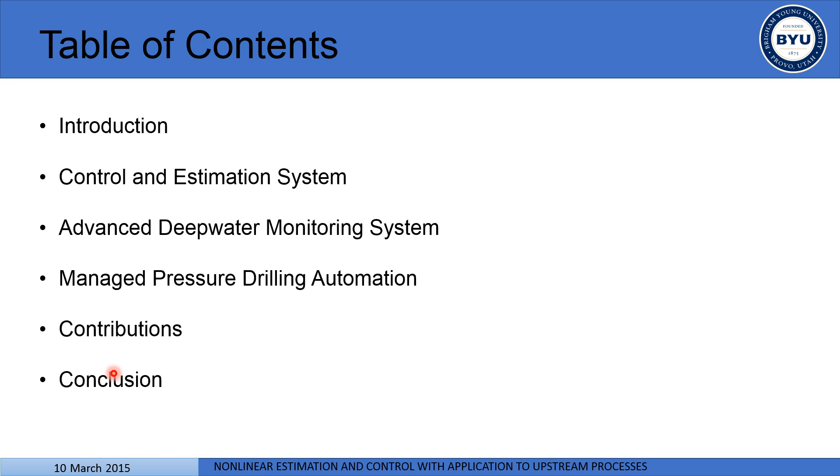First, I'm going to give a little introduction and background about the work and talk about its importance. Then we'll talk about the control and estimation system used for this project, and go over two case studies about advanced deepwater monitoring systems and managed pressure drilling automation. Then we'll discuss the contributions of this work, and conclude the presentation.

Extracting oil is becoming more and more challenging with tighter formations and harsher environments. As drilling reservoirs get depleted over the years, drilling companies have to drill in harsher environments and tighter formations, like shown in these graphs with shale rock and the tension leg platform.

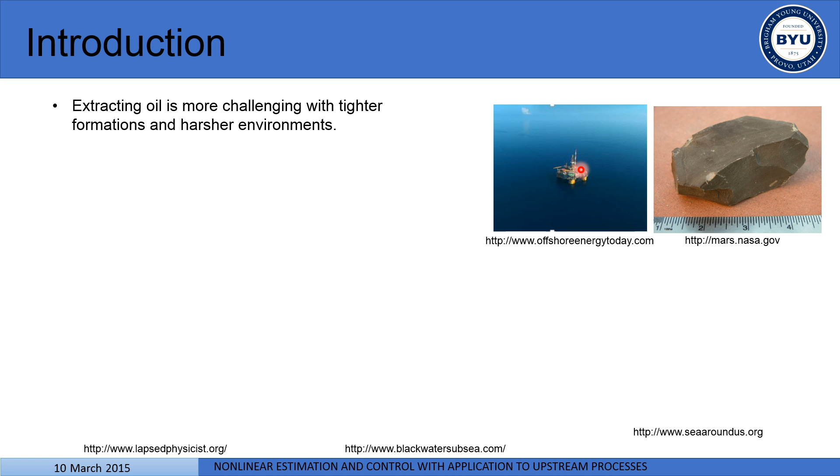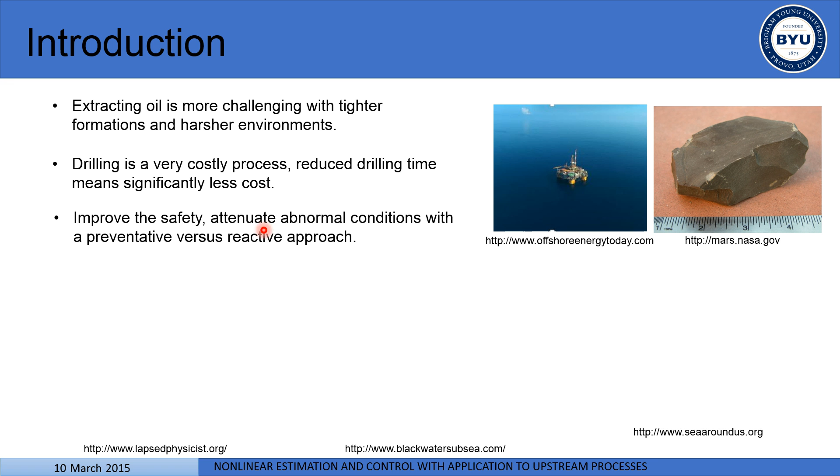The problem with going into harsher environments and tighter formations is the drilling cost, which increases significantly. Another problem is safety, which needs to be improved, since the upstream oil and gas industry is one of the most dangerous industries. There is really a need to attenuate abnormal conditions with a preventive versus reactive approach.

In this picture you can see some of the big catastrophic events that happened in the past. The first one is Deepwater Horizon in 2010, and then the Thunder Horse platform in 2005. These events led to environmental costs, and also threatened the safety of operators and increased costs.

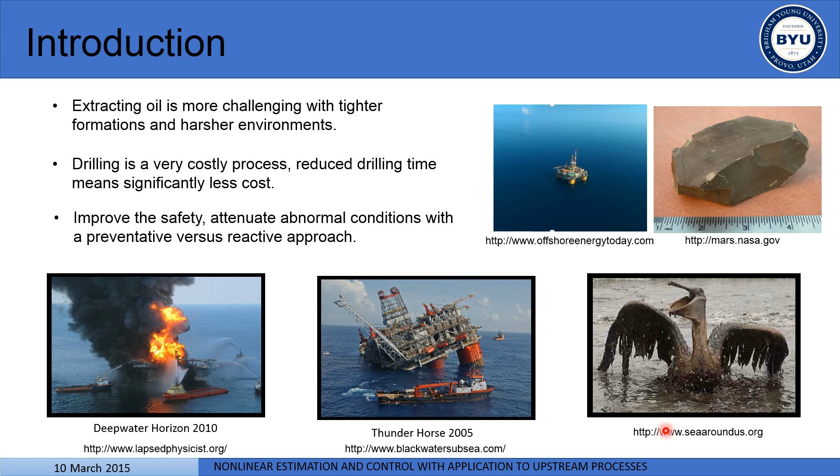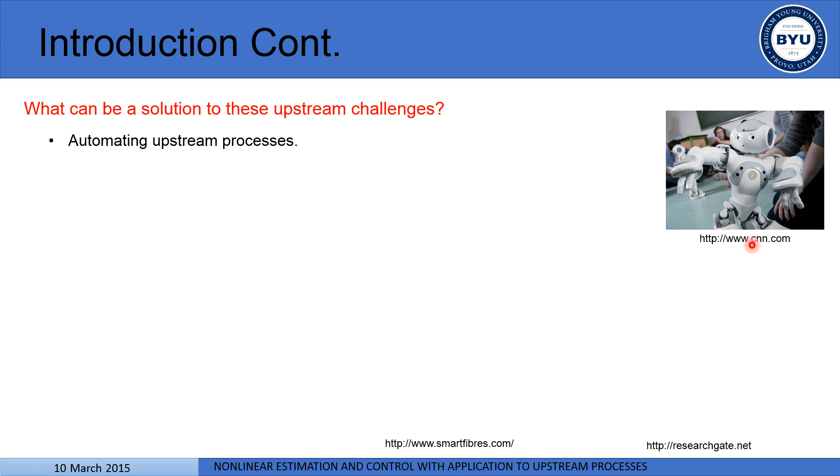So what can be a solution for these upstream challenges? One of the challenges is that upstream processes are mainly manual. Companies in upstream say, other industries like robotics design automated robots, and the UAV industry designs UAVs, but we cannot do automation in upstream. The other problem is that even if they want to design a controller, there is still a lack of sensors and high-speed communication systems.

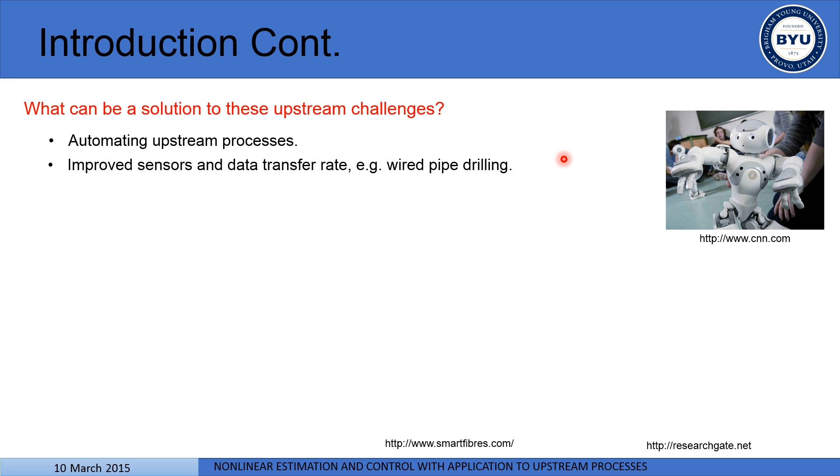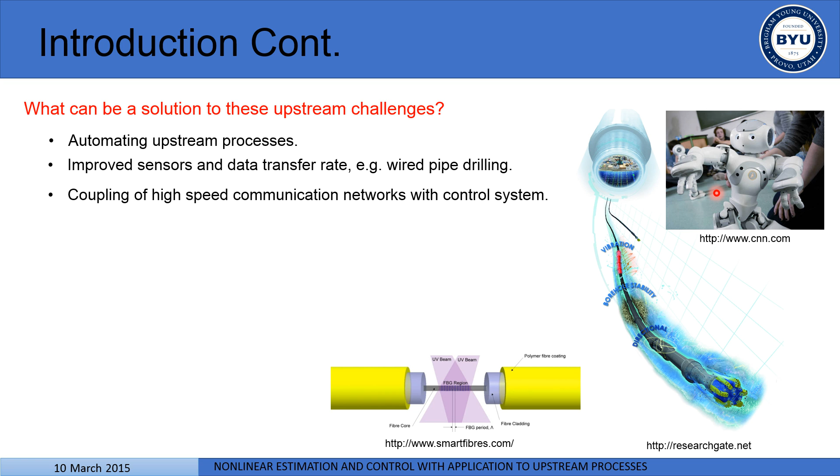Recently, new kinds of data transmission and sensors have been introduced to this industry. These can help fill the gap, so we can design controllers based on that. The goal of this project is the coupling of high-speed communication networks with control systems.

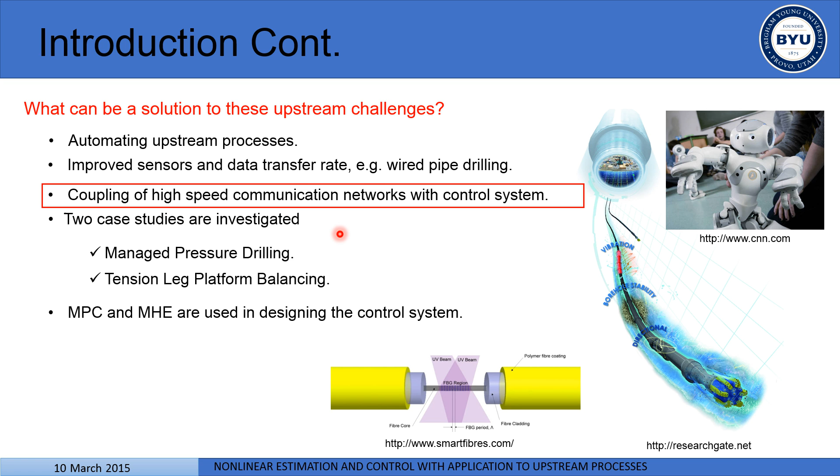For this, two case studies are investigated: managed pressure drilling and tension leg platform balancing. To do this, we use MPC, model predictive control, and moving horizon estimation in designing the control system. So now I'm going to talk about the control and estimation methods used in this project.

For the controller, we use model predictive control. A model predictive controller predicts the system behavior over a time horizon in the future. It takes the system model and creates a cost function based on that, then tries to optimize the cost function over that prediction horizon. Based on that, it determines the best values for the manipulated variables so that the control variable can reach the reference trajectory. It only implements the first input, and then in the next cycle it gets new data and implements it over the next prediction horizon.

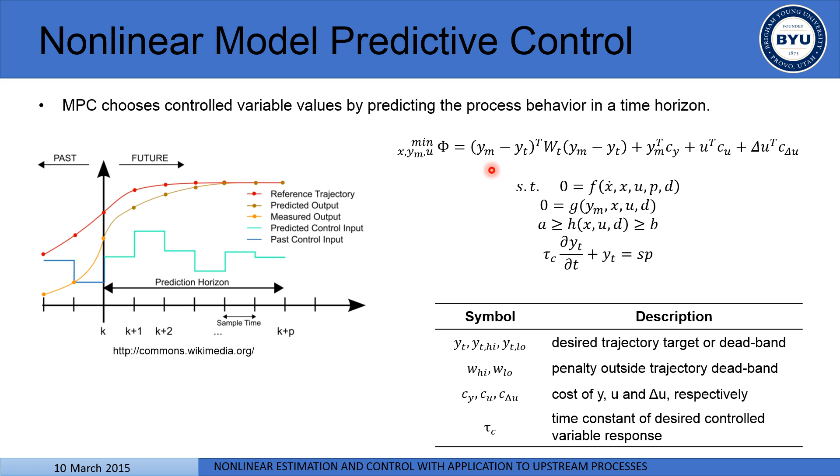This cost function is a squared error term, specifically the squared error between the controlled variable and the reference trajectory.

But there is another new technique for the error term, which we call L1 norm with deadband. It's basically absolute error, but since it's not differentiable, we add slack variables to make it differentiable. We add slack variables for set point high and set point low, putting a deadband around the set point. We believe this approach can increase the robustness of control systems.

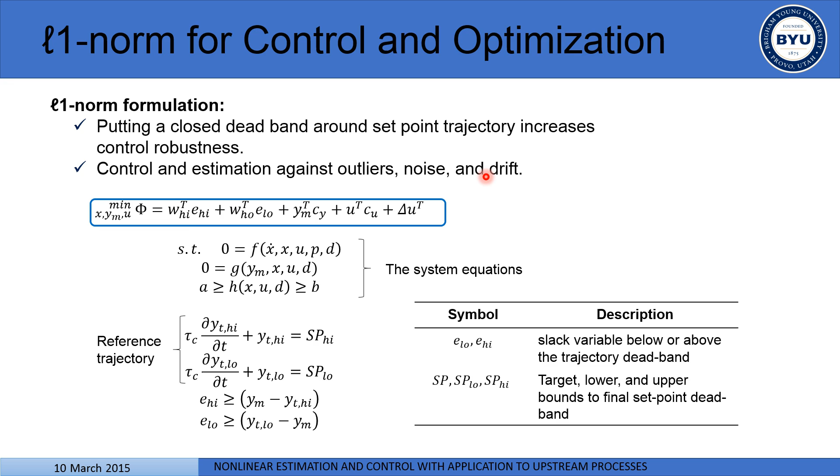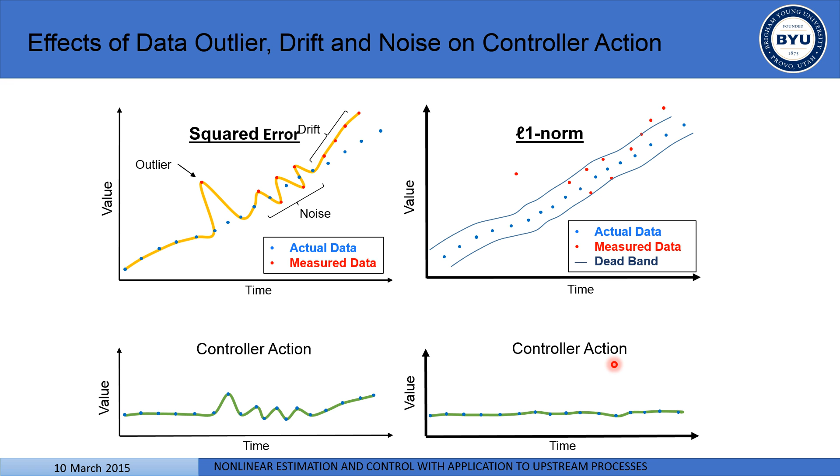But L1 norm with deadband, as you can see in this graph, should be more conservative about it.

So, moving horizon estimation. For estimation, we use a moving horizon estimation approach. It's very similar to model predictive control, but it looks back in time, past in a time horizon, and again it gets the system model and creates the cost function. The cost function is the difference between the measured variable and the modeled variable, and it does optimization to estimate the best value for the estimated variables, so that all of the estimated variables get closer to the measured variable in the past time horizon. The cost function shown here is a square error, because of the square error term.

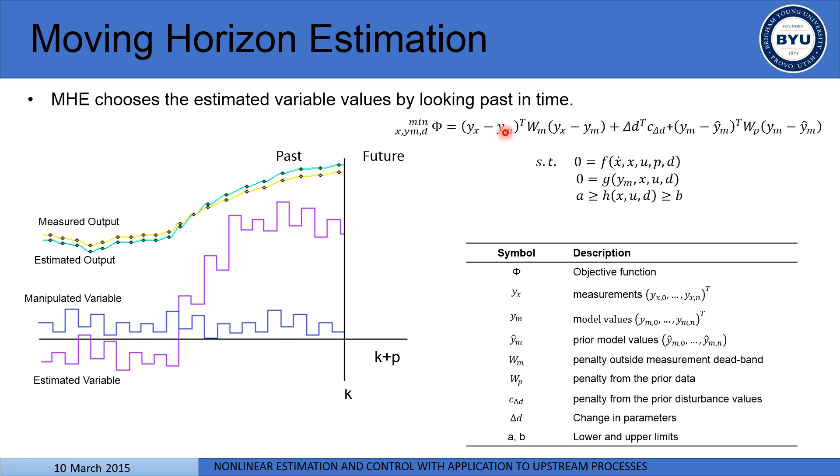Just the same as the control part, we can also have an L1 norm, which is a new technique, L1 norm with deadband. We expect that this can improve the system smoothness and make it continuously differentiable, and it should be less sensitive to corrupted data in industry.

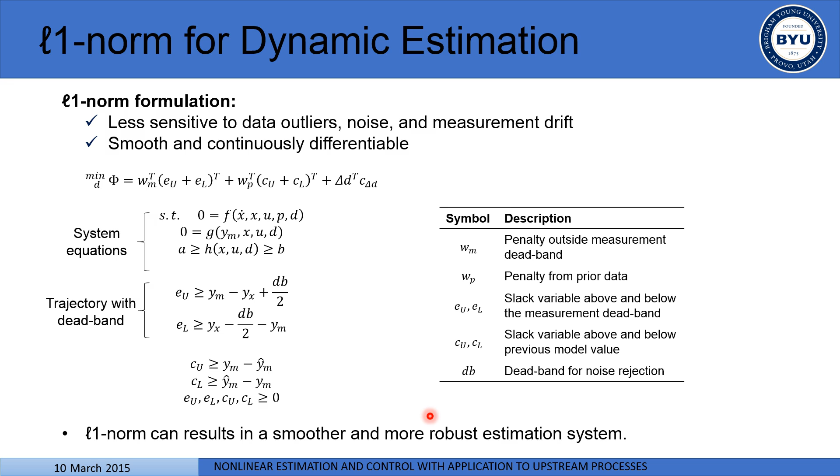In the orthogonal collocator, the differential algebraic equations are changed into polynomial equations, and they are then fed to the controller and estimator, which does the calculation and prepares the cost function and gives it to the dynamic optimizer. Then it gets the result from the dynamic optimizer, and based on that determines the manipulated variable and estimated variable and gives it back to the process.

For the dynamic optimizer, we either use the active set method or the interior point optimization method. Both of them are derivative-based approaches.

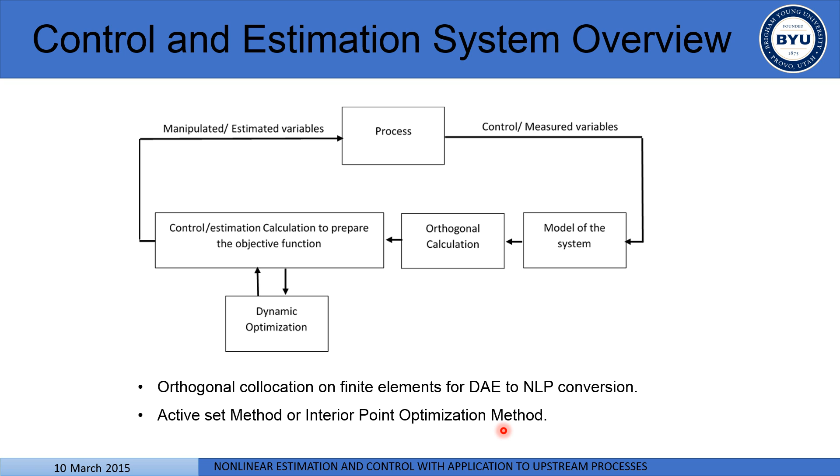As I mentioned, we did two case studies for the coupling of high-speed communication with advanced controllers. The first one is an advanced deep water monitoring system, which was a smaller part of my project. The goal of this project is to design a controller and a monitoring system to balance TLP, tension leg platforms. First, what is a tension leg platform? It is a vertically moored floating structure in the ocean, and it houses drilling and production equipment. There has been no research in the past regarding balancing TLPs using ballast tanks.

But what we see is that TLP platform control is very similar to UAV control during hovering. A quadcopter is controlled by manipulating thrust forces from individual rotors as well as balancing drag torque, and a TLP is controlled by manipulating the ballast tank water levels as well as tendon lengths.

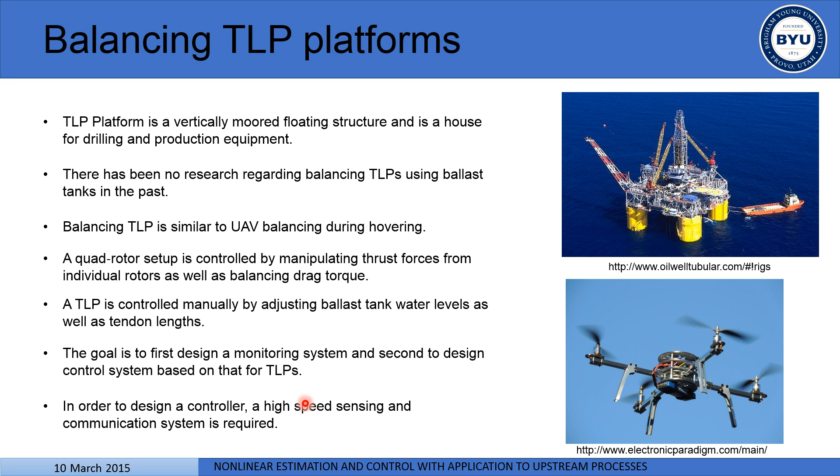So the goal here is to design a monitoring system for the TLP platform and then design a control system based on that. In order to do that, a high-speed sensing and communication system is required.

In this slide, I go over the monitoring system that we designed. The monitoring system for TLP is based on fiber Bragg grating sensors. How a fiber Bragg grating sensor works is that wavelengths are sent through a laser to the Bragg grating sensor, and the Bragg grating has different refractive indexes, and based on that it reflects back part of the wavelengths. We get that wavelength, and based on its value we can determine the temperature and strain values.

This picture shows the schematic overview of the monitoring system that we designed, and you can see it's a combination of multiple programming languages that can talk to each other.

To install them on the TLP tendons, we used specially designed clamps on each one of the tendons, as you can see in this picture.

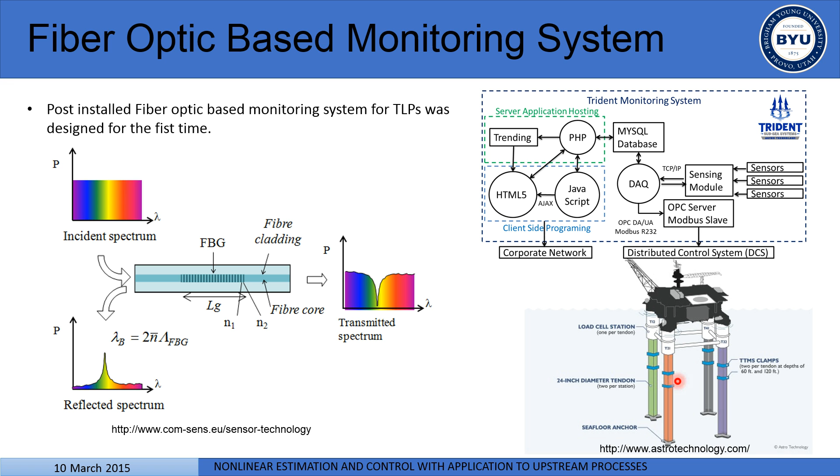Results after installation: we actually installed this system on two real tension legs on the west coast of Africa, and you can see the real results from that. You can see that in 24 hours we have two tides that happen over time, and you can also see the waves, the smaller noises here.

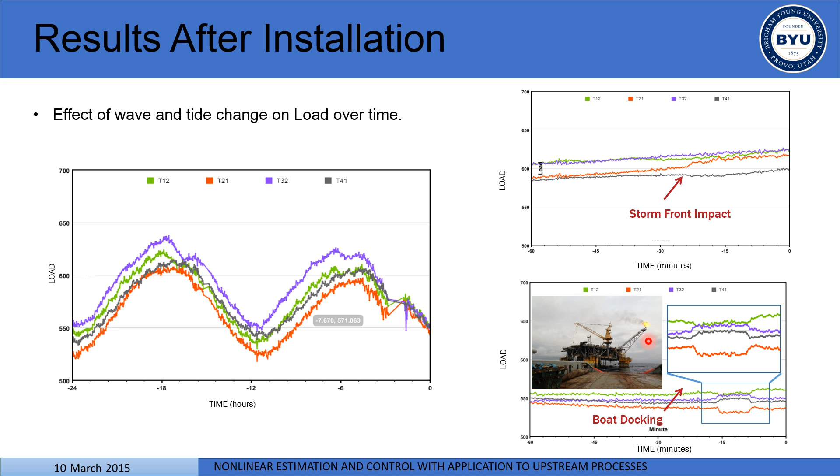This system showed that it is much more sensitive to any change in the environment. For example, storm front impact and boat docking were very visible on this system, things the operators' conventional system couldn't catch.

For designing the control system model, what we said is that in each one of the tendons, the load is the load of the platform itself plus the load from the tank, minus the buoyancy load, minus the wave load, and plus the tide load.

For the load of each tank, we use the time transient equation for the volume of the tank, which depends on the pump flow rate, the exit flow rate, and exit valve opening. For buoyancy, we use an empirical equation to determine buoyancy in the modeling part, but for the controller, we say buoyancy is measured as the percentage of the platform that is inside water. For wave and tide actions, we modeled them with sinusoidal equations, but for the controller they are assumed to be disturbances.

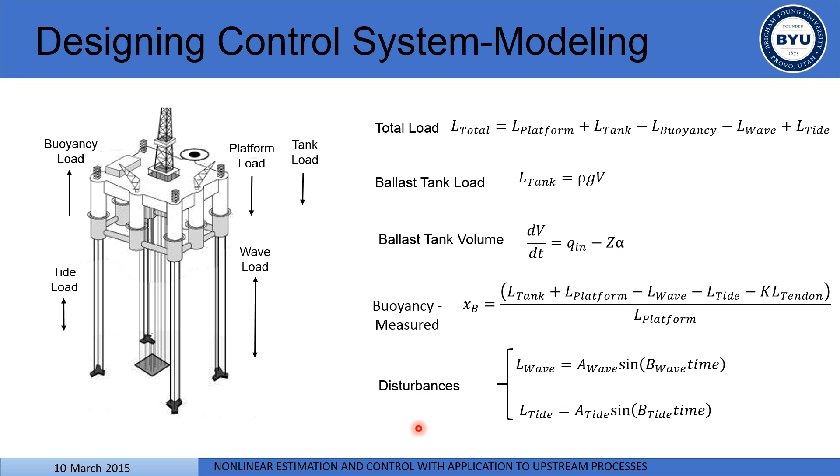This graph shows the schematic overview of the control system. As you can see, the tide and wave actions are considered disturbances into the system, and the data acquisition sends the measurements to the controller, and the controller also gets the set point from the operator.

So for modeling the TLP platform itself, we use the equations we just showed you, and we also use the same ones for the controller design, except for the tide, wave, and buoyancy.

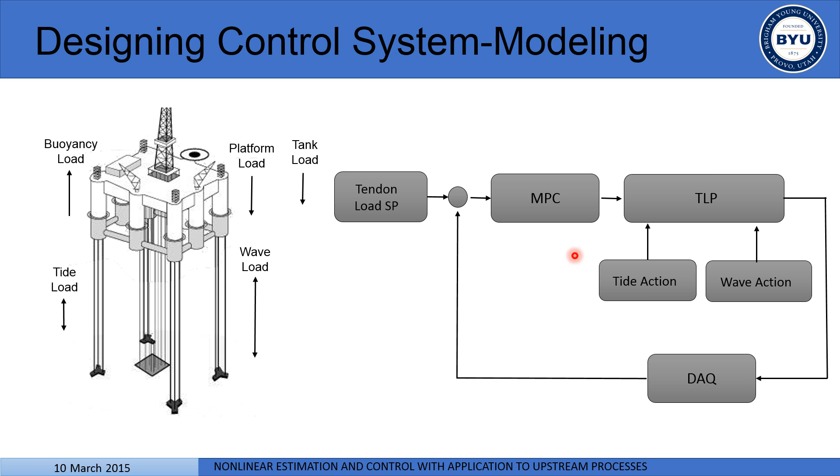These are the results of the control system in a simulated environment. As you can see from these graphs, the dashed red line shows the change in the loads over a 24 hour period without a controller, but the other lines show how the load changes with the controller. You can see that the controller is able to significantly decrease the tide effect on the TLPs.

This controller was mainly designed to attenuate the effect of tide, not the waves. Whenever the tide is falling, the controller opens the valve to compensate for that, and whenever the tide is rising, the controller opens the pump to compensate for that. We designed the controller so it either opens the pump or opens the valve based on the magnitude required.

Also in the graph on the right, you can see how the volume of the tank is changing based on what the controller wants.

So we believe that with these results, we can say that automatic balancing can result in reduced drilling time, because the TLP becomes more balanced, and this can also lead to increasing the lifetime of the TLP. Advanced monitoring and control systems can improve the safety of the TLPs for sure.

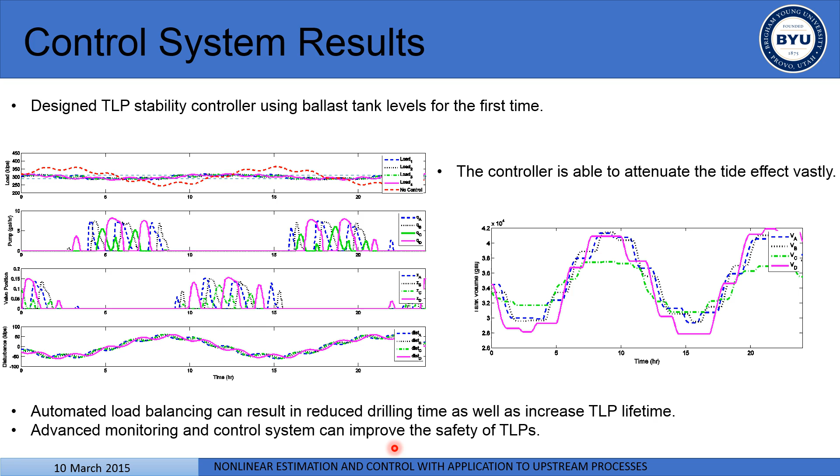So the next section, which is the majority of my project, is managed pressure drilling automation. First of all, what is managed pressure drilling?

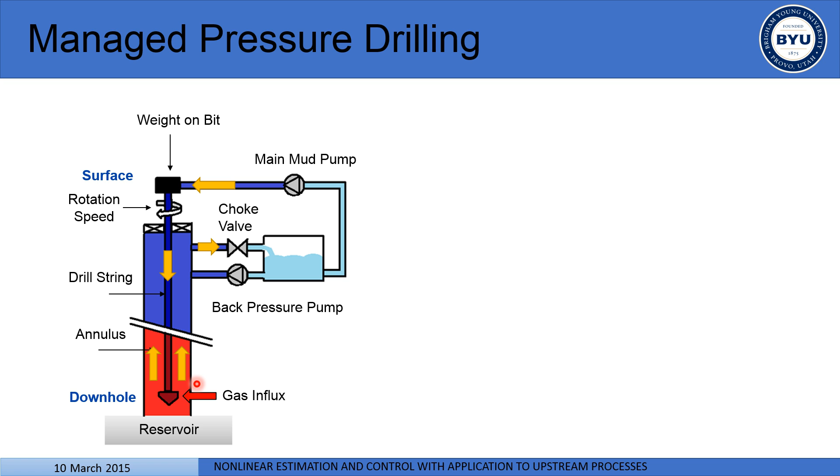In managed pressure drilling, mud is pumped with the main mud pump, and it goes through the drill string and through the drill bit, then comes back up through the annulus and through the choke valve into the mud pit. Weight on the bit and rotation speed are used to change the rate of penetration of the bit, and the main pump and choke valve are used to determine the pressure, along with the hydrostatic effect of the mud. Sometimes gas influx happens, and if it's more than a specific value that cannot be controlled, we call it a kick.

Some of the variables are known, meaning we can measure them. They are everything at surface, but from the variables at the downhole we can measure RPM and weight on the bit, because RPM and weight on the bit are different from surface and downhole. Annulus pressure is also measured, but we can send it to the surface through either mud pulsing or wired pipe technology. Not every variable can be measured.

Some of them are unknown, such as the density in the annulus and the friction factor in the annulus, as well as downhole drilling fluid and gas influx flow rates, which cannot be measured. So as we mentioned, for this project we designed a controller based on wired drill pipe.

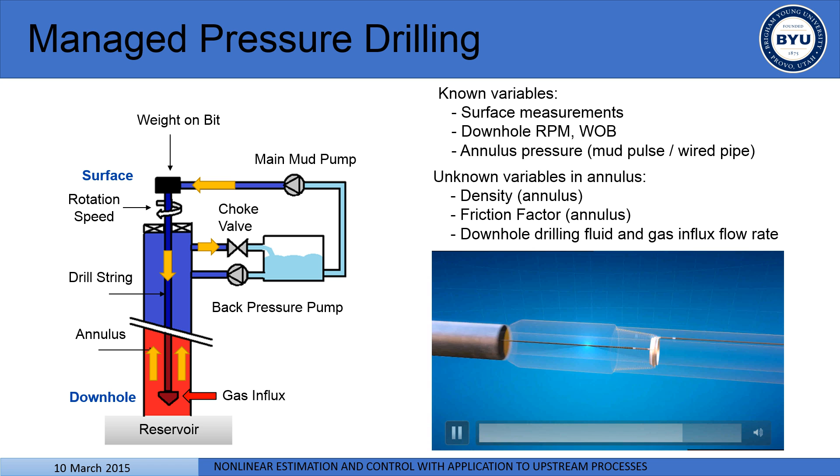As you can see in this video, the measurements go through a wire line in each of the drill pipes, and at the end of each drill pipe, in each connection, it goes through a coil and then gets connected to the next drill pipe. In this way, all of the pressure measurements are sent to the surface, and this is a new technique in the upstream industry that has very high speed.

Okay, so first we want to talk about the previous work that has been done for managed pressure drilling. In managed pressure drilling, researchers have looked at it as two separate tasks. Part of the researchers have tried to maximize rate of penetration with optimization techniques, changing the RPM and weight on the bit, and some researchers have tried to regulate borehole pressure with changing the choke valve and the pump flow rate.

So the thing is that ROP also depends on borehole pressure, and borehole pressure depends on friction factor, and through friction factor it depends on the RPM.

We believe that with this controller, for the ones that have designed the BHP system, if they consider these as two separate tasks, they ignore the effect of weight on the bit and RPM along the drill string, and also they have ignored the effect of downhole pressure on the rate of penetration. There is potential for improving that.

For the pressure, most of the researchers have used surface measurement without wired drill pipe, and this can lead to delayed response to the kick event, because whenever a kick happens at the downhole area, it takes some time for the effect of the kick to be felt at the surface. Also, estimation of the fluid properties becomes difficult with this, because we are not measuring pressure directly, and this leads to reactive pressure control versus proactive.

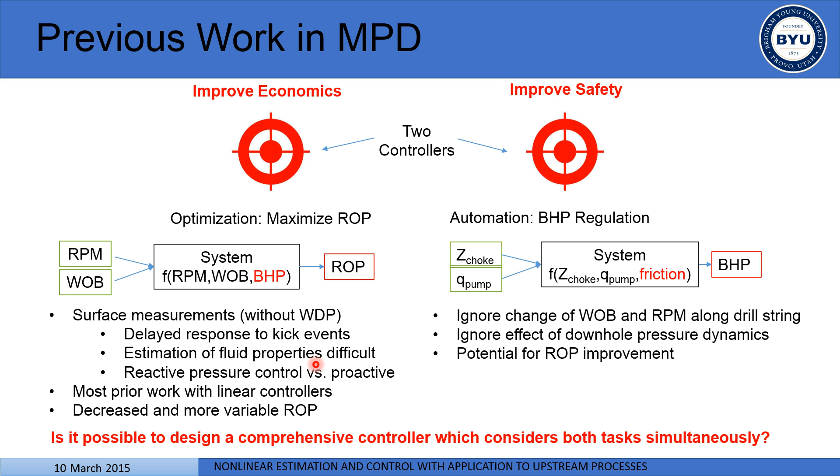Our proposed solution is a comprehensive controller that controls both of the tasks simultaneously. It tries to control both borehole pressure and rate of penetration at the same time, by changing all of the manipulated variables, including choke valve opening, pump flow rate, RPM, and weight on the bit.

The features of this controller: first, as I mentioned, it simultaneously controls both of the variables. Again, if we want such a controller, we have to consider the interaction between the drill string and the hydraulics. We can also propose a new methodology for kick attenuation based on direct borehole pressure measurements from wired drill pipe telemetry.

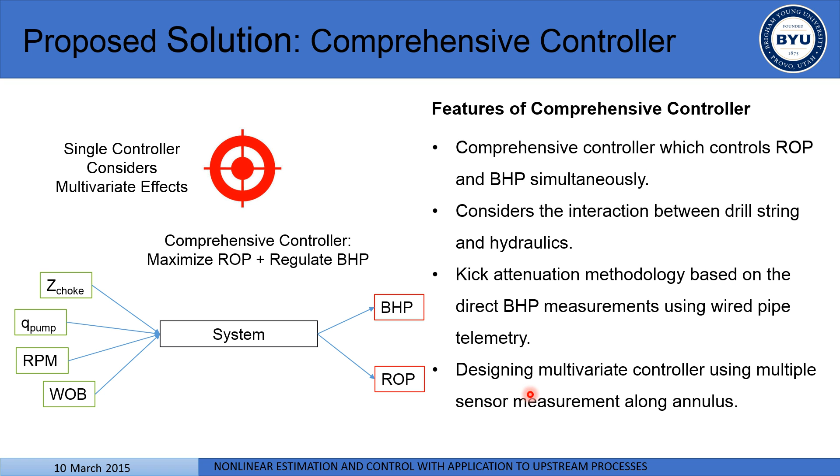Another thing that we wanted to do is design a multivariate controller using multiple sensor measurements along the annulus. This is possible using wired drill pipe.

What are the expected advantages? Expected advantages are higher ROP and less fluctuations in ROP, improved kick attenuation with an extra manipulated variable, because we add extra load and can further increase the pressure in the annulus, decreasing the gas influx flow rate faster. This can also lead to earlier detection of cuttings buildup during drilling, and in the end it will improve safety and reduce drilling cost.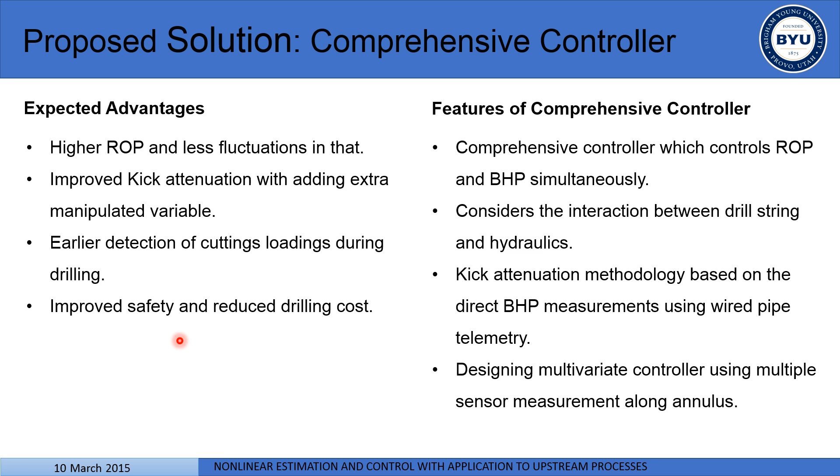So, model components that we use - I'll just go through them as an overview. For pressure hydraulics, we use the lower order model from Stamnes et al. Then, as mentioned before, the interaction between drill string and hydraulics needs to be considered so we can have a comprehensive controller.

For that, we say ROP also depends on the downhole pressure. Therefore, we use the Bourgoyne and Young model, which has a term for the downhole pressure effect on ROP.

We also say the friction factor in the annulus depends on both axial and rotational flow of the mud. As you can see in this graph, mud has two kinds of flow rates: axial flow rate and rotational flow rate. There are some empirical equations relating the friction factor to both of these flow rates.

So we use this, and we said okay, if we change the rotation speed of the drill string, we can affect the rotational flow of the mud, and therefore we can affect the friction factor, and we can affect the pressure loss. This way we can affect pressure by changing the drill string characteristics. This is one of the contributions that hasn't been done before and is unique to this controller.

To model the drill string dynamics, for the drill string we use multiple mass spring damper pendulums in series, and for the weight on bit dynamics we use a first order plus dead time model, which is an empirical model. Both of these relate the surface value for weight on bit to the downhole weight on bit.

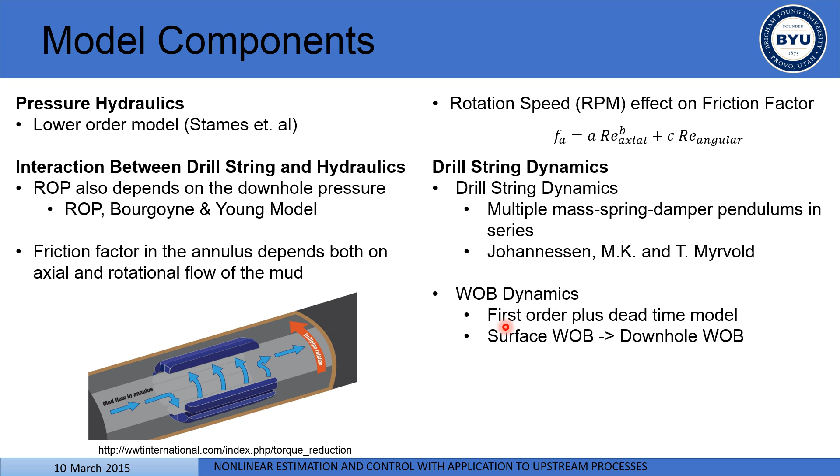Another thing for this research is that previous researchers have only considered one weight on bit value, while this research considers both surface and downhole weight on bit, and the same thing also for RPM.

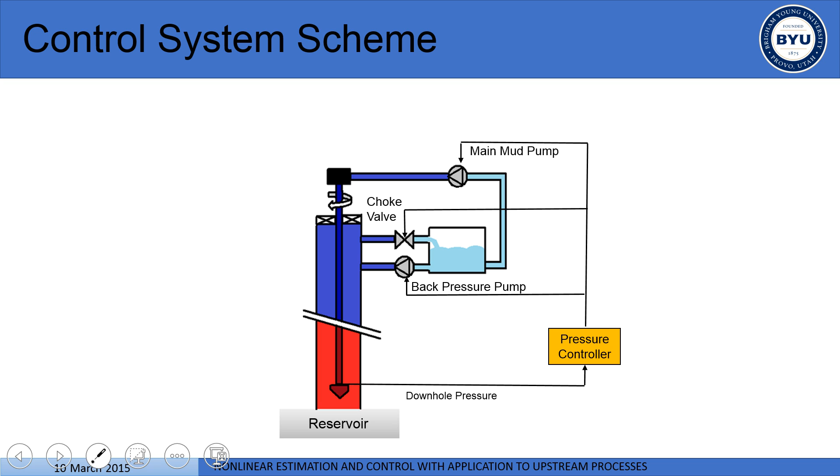So how do we design the control system? First, we put the pressure controller, and it controls the downhole pressure by changing the pump and the choke valve. Then, because this is a model predictive controller and it needs a model of the system, not every variable is measured in this controller.

So therefore, we need to have an estimator, as I mentioned before, so that it can estimate some of the values for some of the variables, for example, density, friction factor, and gas influx. And it is fed to the controller.

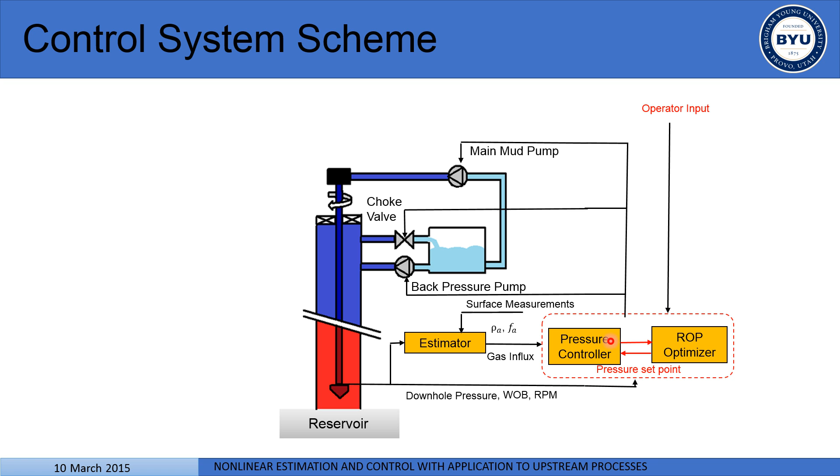And after that, we added an ROP optimizer with the interaction between the drill string and the hydraulics. And this ROP optimizer is able to determine the best manipulated variable by considering both the dynamics of the drill string and the hydraulics.

And it determines the choke valve opening and the pump flow rate. And at the same time, it also determines the best downhole weight on bit and RPM.

Again, we have two different controllers, one for weight on bit and one for RPM, each of which gets the set point from the comprehensive controller, and then they change the surface values for RPM and weight on bit so that the downhole values for them can get closer to the set point ones.

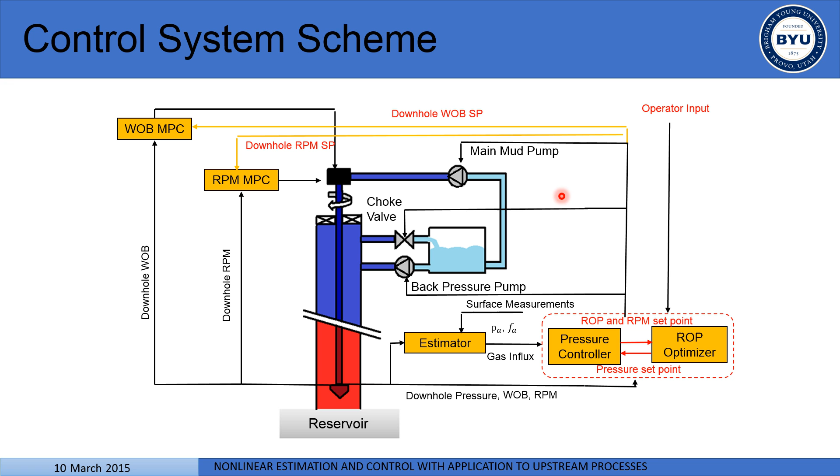So in this system, during normal drilling conditions, the ROP set point is given, and based on that it determines what the downhole pressure set point is, based on all of the interactions between the drill string and the hydraulics, and based on that it changes all of the variables in a way that leads to higher ROP.

And for kick attenuation, we also proposed a new methodology. During normal operation we have our set point as downhole pressure.

Whenever a gas influx happens, the value for the downhole pressure that is measured with the wired drill pipe is going to change. If it is more than a specific limit, then the controller is going to say we have a kick condition. Another way for the controller to determine if a kick happens is that the gas influx flow rate increases, which it gets from an estimator.

So once it determines a kick has happened, it switches the controlled variable from downhole to the surface and sets the choke valve pressure as a new set point. Its new set point is the value of the choke valve before the kick happened plus an error term, which is like a PID equation.

So then it tries to change the choke valve opening and the pump flow rate, and also the rotation speed, RPM, so that it can reduce the gas influx flow rate. It does this until the gas influx flow rate gets less than a specific limit.

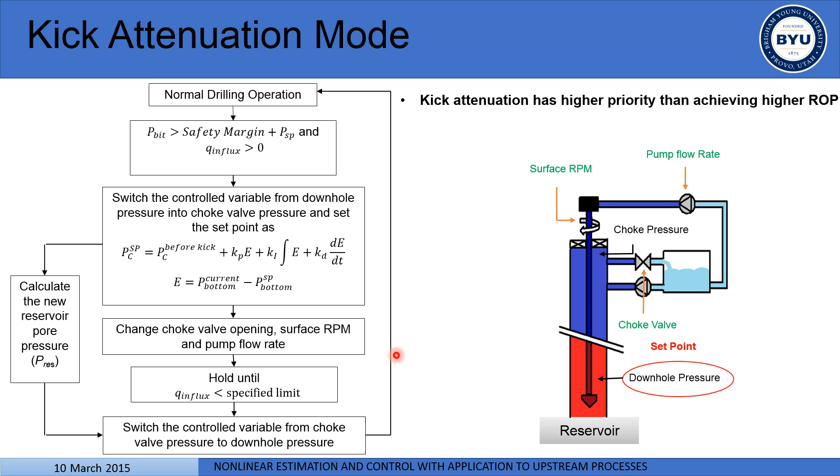And therefore, when everything comes back to normal and the kick is attenuated, we go back to normal drilling with the downhole pressure having a new set point based on the new reservoir pressure value.

So now, as I mentioned before, we design a controller in three steps. The first one is a single pressure controller, the second one is a comprehensive controller, and the third one is a multivariate controller. In this section I'm going to present the results for the single pressure controller.

I'm not going to show you the graphs for the results of this normal drilling condition, just because of lack of time. But the designed controller, the moving horizon estimator for the single pressure controller, was able to accurately determine the friction factor and the annulus density within 1.5% of actual value in 30 seconds.

And also, the drill bit pressure controller was able to control the drill bit pressure within 0.72% of the set point within 30 seconds.

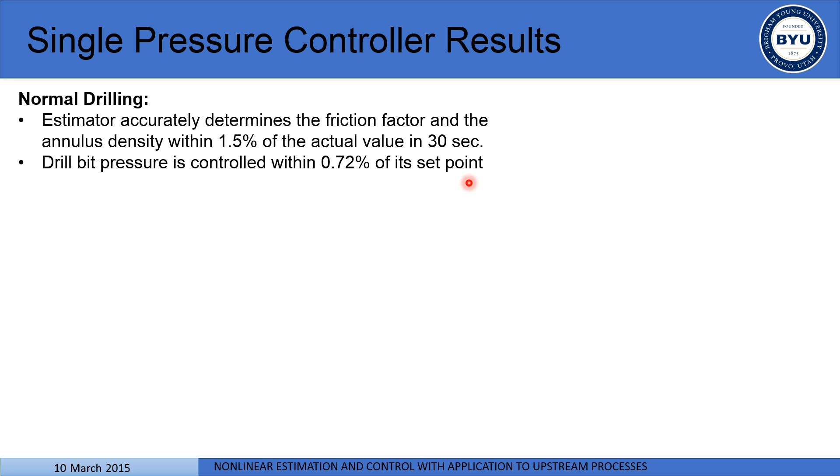So during connection procedure, first, what is a connection procedure? During connection, we call connection procedure for a time that a new drill pipe is added to the drill string, and in this case the main pump gets ramped down until it gets shut down, and the new pipe is added, and it again gets ramped up, everything back to normal.

But in this condition, we are losing the head of the main pump at the downhole area. Therefore, our pressure at the downhole decreases. It's kind of dangerous, because if the pressure gets too much lower than the reservoir pressure, it can induce the kick. So the controller that we designed was able to change the choke valve opening and also the back pressure flow rate accordingly, so that it is able to hold the pressure almost constant within 1% margin of error during connection procedure.

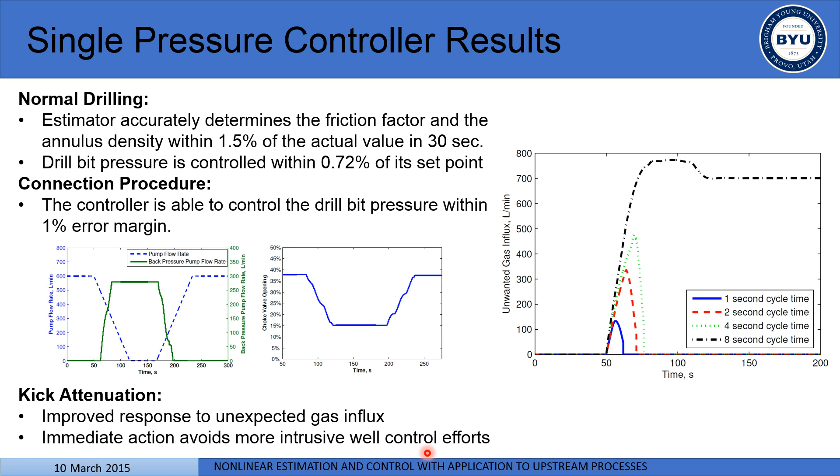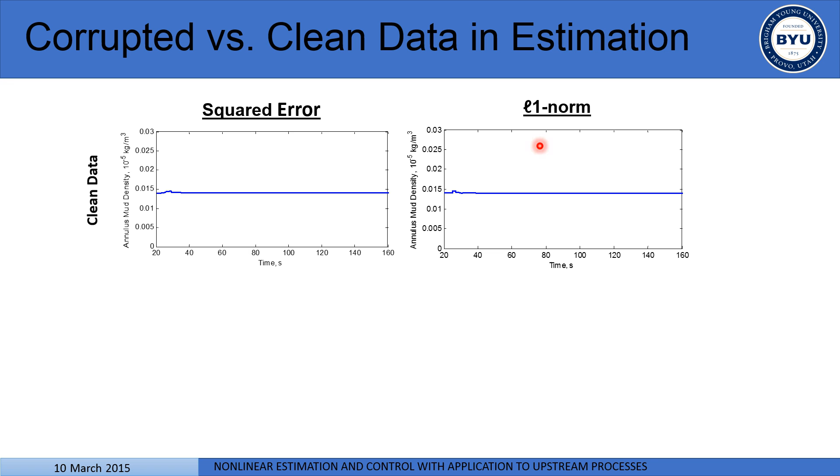So in this slide, I'm gonna compare the estimator and the controller in case of corrupted data versus clean data. As you can see on the graphs on the top, we have clean data, and there is not a specific difference between the L1 norm and the square error. But when we go to corrupted data that has drift and outliers, you can see that the L1 norm is able to be more resistive to that.

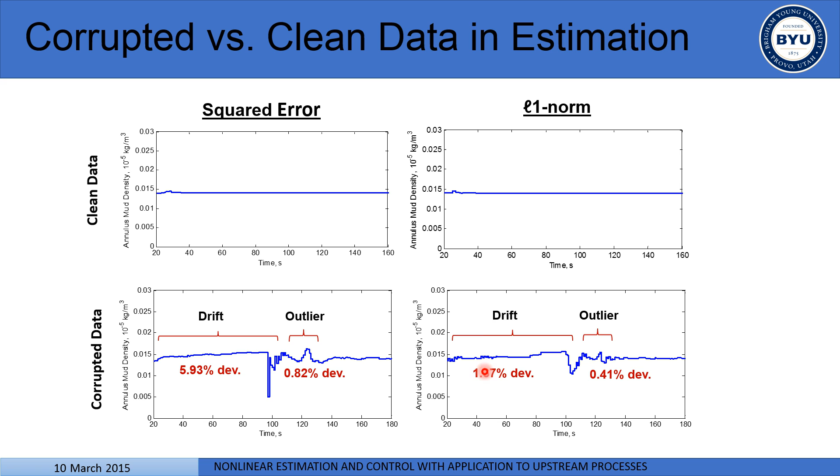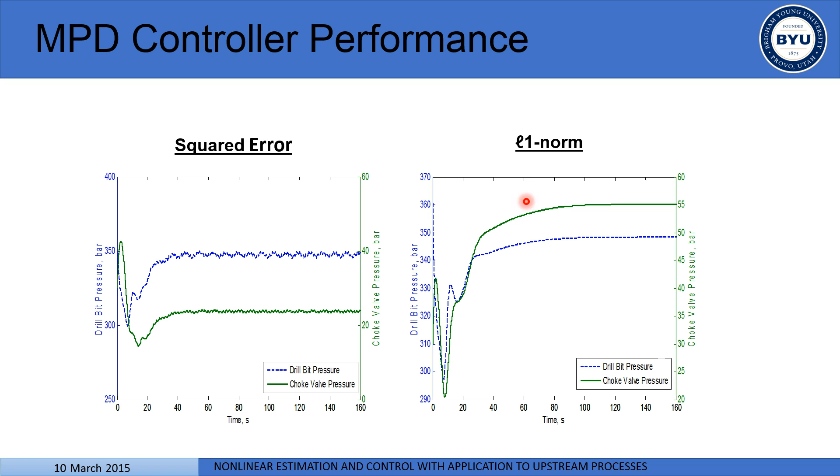And the same thing again for the controller. In case of corrupted data, the square error has some problems with oscillation, but the L1 norm is much more smooth, just the effects that we were expecting to see.

Okay, the next part is managed pressure drilling automation with comprehensive controller. So the comprehensive controller was designed based on the models and ideas that I just told you, and the results show that ROP, rate of penetration, in case of comprehensive controller increases versus the single pressure controller. The reason for that is that during comprehensive controller we have less downhole pressure, and decreased downhole pressure exponentially increases the ROP.

And also another great result is the kick attenuation. It was found out that having a comprehensive controller, we are able to even attenuate the kick much more faster. So in this graph, the black line shows how an operator would react to a kick, so it's a manual attenuation of the kick. The blue line shows how our single pressure controller reacts to a kick, and the red line shows how the comprehensive controller is able to react to the kick.

And the reason it is able to attenuate it faster is because it has an extra manipulated variable, which is the rotation speed of the drill string, and it increases that, and with that it increases the pressure loss in the annulus, and therefore the pressure in the annulus increases, and that avoids more gas influx coming inside the annulus.

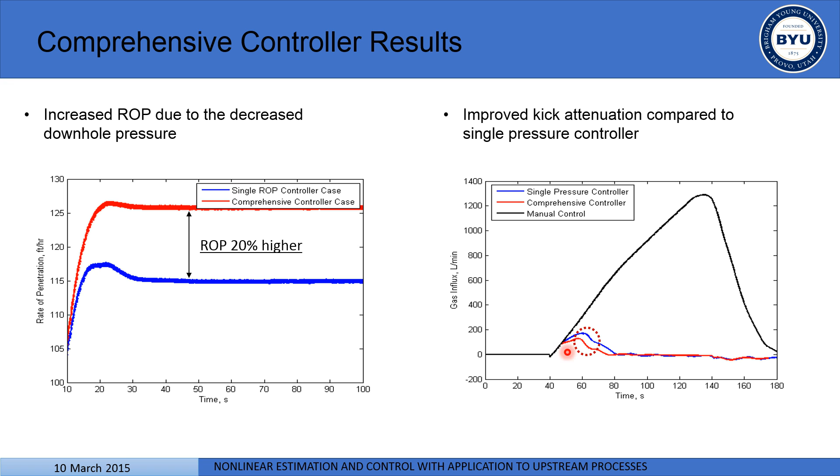And another great feature - all of these are new things in the upstream industry that have never been done before. So another interesting result is that the controller is also - before that I want to mention how the manipulated variables change. The choke valve opening decreased during the kick. The controller also increased the pump flow rate, and as you can see, it also increases the rotation speed.

But another interesting feature for this comprehensive controller, because it considers the interaction between the drill string and the hydraulics, is that it is able to even hold the rate of penetration consistent during a kick. Because whenever it sees the rotation speed is going up, it decreases the weight on the bit, so we have consistent rate of penetration, and this consistent rate of penetration avoids cuttings buildup, which is a big issue in the upstream industry.

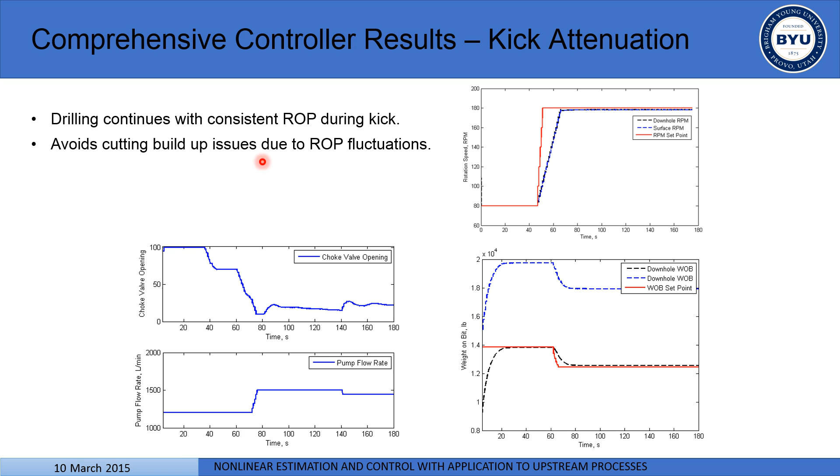And in the last section, I'm gonna talk about managed pressure drilling automation with a comprehensive controller using multiple pressure sensors.

So in this slide, the left one, you can see the different values for the densities. Remember I told you in the multivariate controller we have multiple sensors along the annulus. Because we have multiple sensors, we are able to estimate multiple densities along the annulus. Therefore, whenever there is a cutting buildup in one location, the density in that location gets increased.

So these are the results from our moving horizon estimator. Whenever the density is increased - for example in this graph you can see the density at location 5 starts to increase after 30 seconds.

So we can see that there's a cutting buildup happening, and the change in the density is also fed to the controller, so that the controller can take required actions. The graphs on the right show the effect of the cutting buildup on the pressure loss. As you can see, it caused a very slight increase in the pressure values, which is very hard for the human eye to detect. This shows the significance of this control system. With this, we are able to detect the cutting buildup much faster, so the required action can be done.

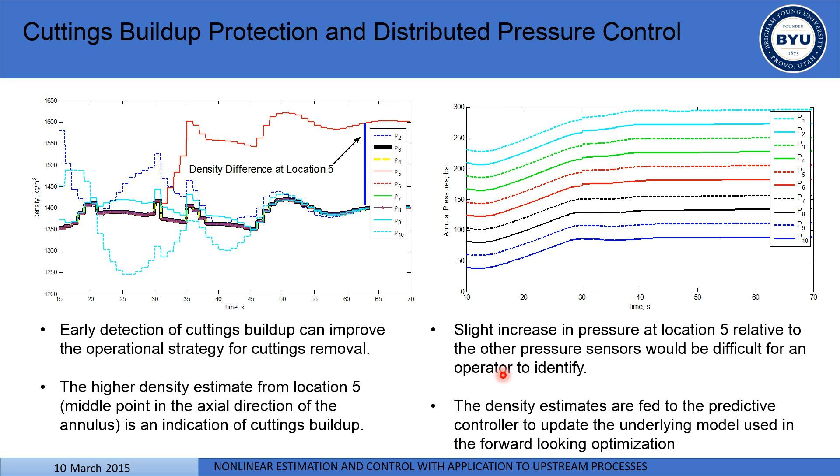Faster than the operator. We also tested this in the case of a kick, which happens not exactly at the bit but at another location further up. The results from the multiple sensor controller showed that it is able to achieve even better improved kick attenuation. That's because the sensors closer to the kick location are able to sense it earlier, so the controller can react earlier. This comprehensive controller changes RPM, pump flow rate, and the choke valve opening to do this.

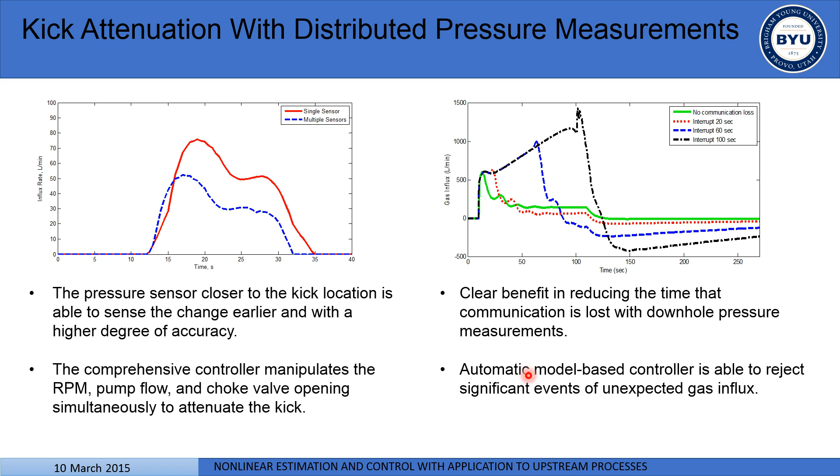The graph on the right also shows the clear benefit of not having too much interruption time. As you can see, this is again the controller reacting to a kick with different interruption times. As the interruption time increases for the communication of data to the controller, it becomes harder for the controller to attenuate the kick. But in all of these cases, the automatic model-based controller is able to reject significant events of unexpected gas influxes.

So in the end, the contributions of this project: we showed that combining advanced high-speed sensing and communication systems with an advanced controller can lead to significant improvement in the upstream industry, including managed pressure drilling and TLP platforms. Specifically, we designed a comprehensive controller that simultaneously controls rate of penetration and downhole pressure using wired drill pipe technology. For this, for the first time, we added the effect of drill string rotation on pressure loss in the annulus to the control system.

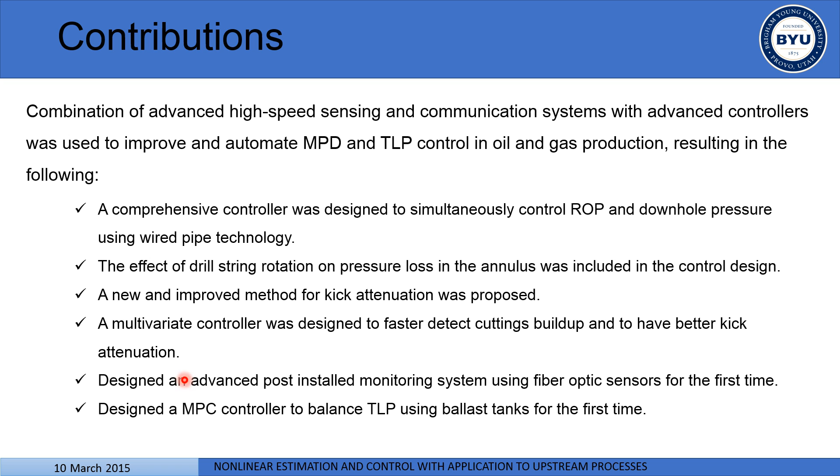We also proposed a new and improved method for kick attenuation. The multivariate controller that we designed is able to faster detect the cutting buildup, and it also has a better kick attenuation feature. In the case of the TLP, tension leg platform, we designed an advanced post-installed monitoring system based on fiber optic sensors for the first time, and we designed an MPC controller to balance the TLP using ballast tanks, again for the first time.

The conclusion is again a combination of high-speed sensing and the advanced controller. In the case of TLP platforms, this can lead to very stable performance and improved safety and economics. In the case of drilling, it leads to synchronized control moves with enhanced safety and economics, caused by higher ROP, regulated bottomhole pressure, fewer halts in operation, and successfully attenuating the kick.

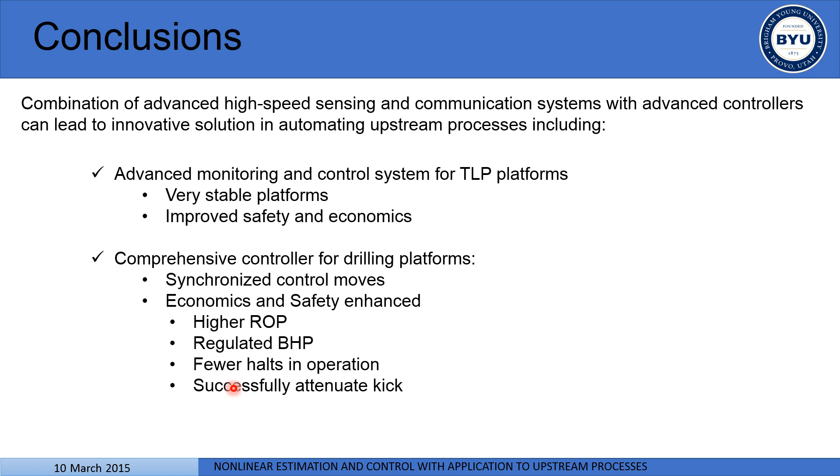So for future work: all of the simulations that we did used a lower order model of the system, both for TLP and managed pressure drilling. It's better to use a high fidelity simulator for MPD control, so that we can also test the controller against that, and even improve the controller design.

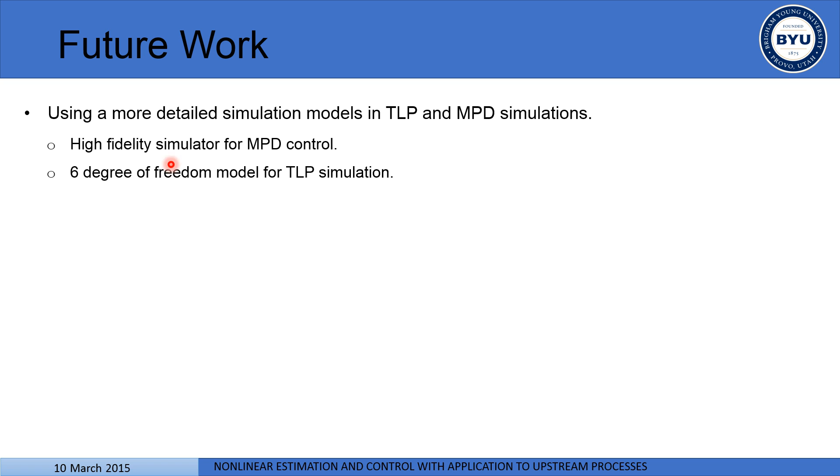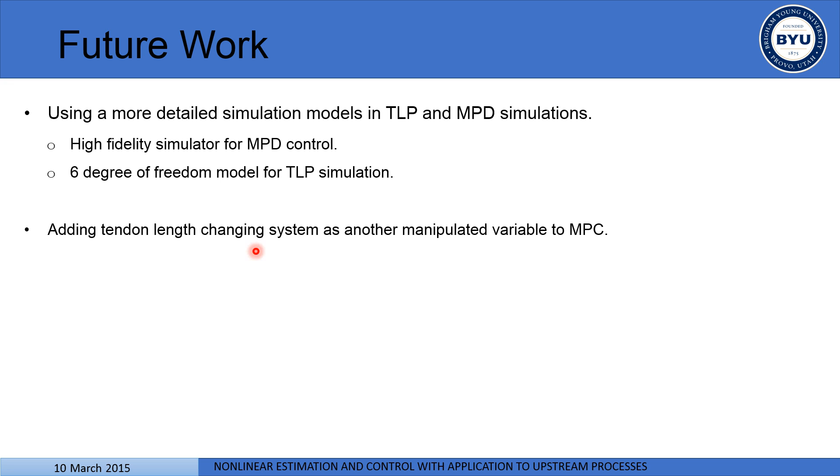It's also better to design a controller against a 6 degree of freedom model for TLP simulation, just like what is being done for UAVs. Another thing is that we can add a tendon length changing system as another manipulated variable to the MPC.

For drilling automation, another thing that can be done is data reconciliation and validation for drilling. That's because we can design a controller which is able to resist more against data quality problems, so whenever a measurement from a sensor gets lost, it can use the estimated value instead.

Also, the controller that we designed in this work uses the downhole pressure value to determine the kick mostly. In the future, we can consider all the variable changes during a kick event, which can lead to reduced false alarms during any disturbances during drilling.

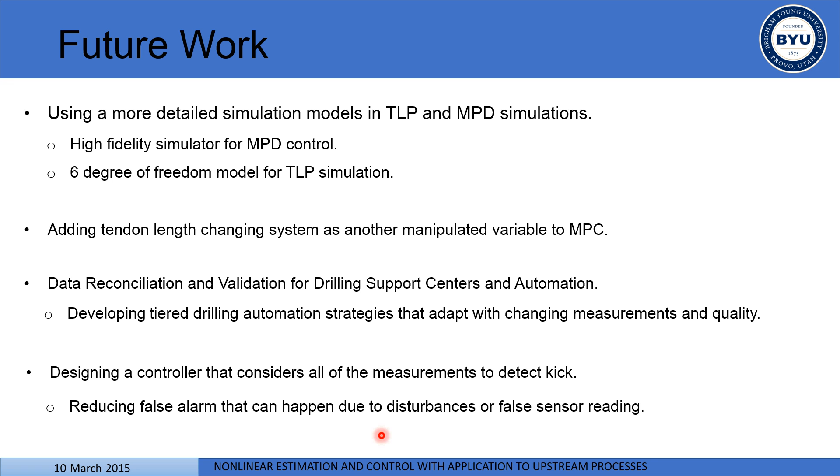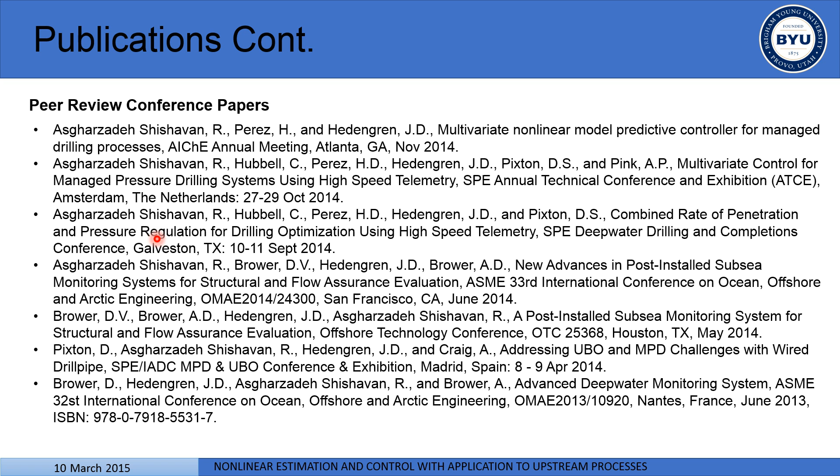For publications, I have had 2 accepted journal articles, 2 submitted journal articles, and 7 peer-reviewed conference papers, 4 proceedings, and 1 press release. In the end, thank you for your attention. I'm ready to answer any questions.